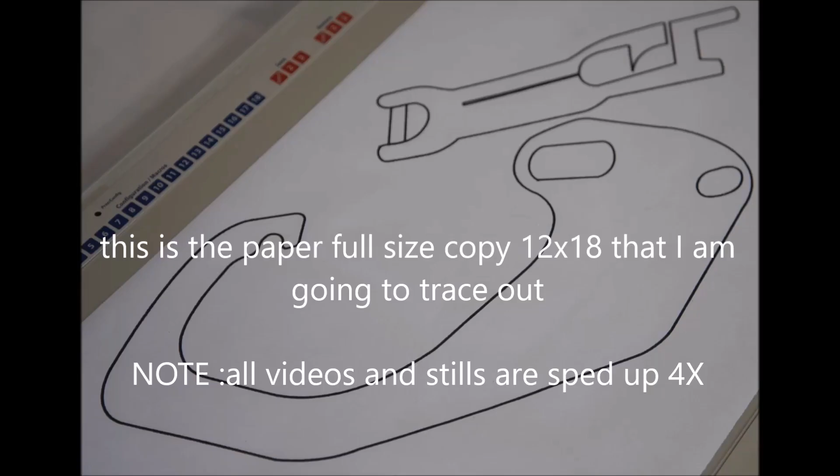I'm going to use Logic Trace to create a 3D file. I'm going to be using the small drawing board, the drawing board 6. It's 12 by 18 inches. This is the paper copy that I'll be tracing. I call this the portable drawing board.

First thing I'll do here is define the 4 points, and then I'm going to select trace. You can see here where I've selected the 4 points of the diagram.

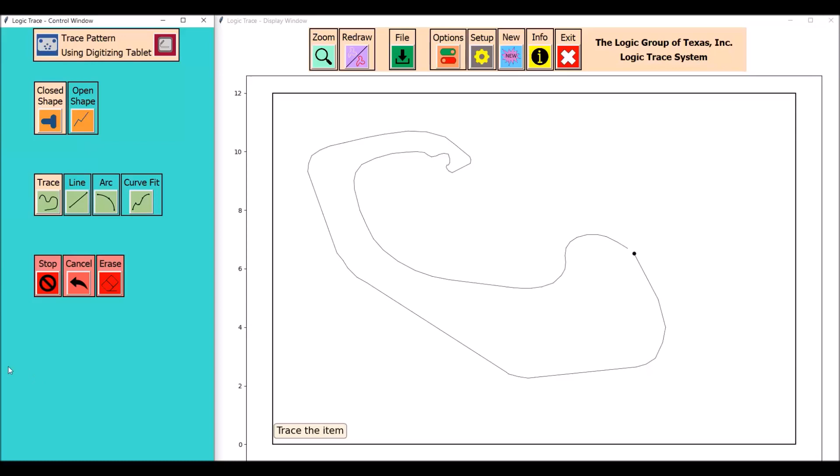This is going to be an interesting project because we're going to take a DXF file that we're going to trace out and convert it to an STL file for 3D printing.

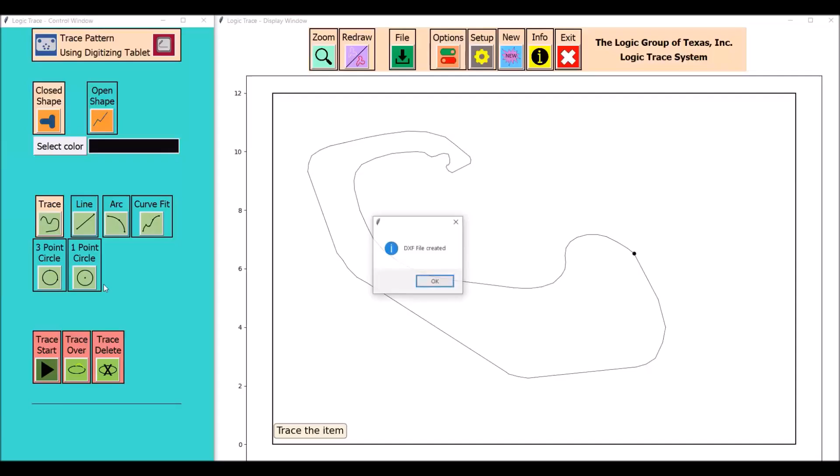It's an easy diagram to trace out. There's only 6 parts. This small drawing board has a plastic overlay, and you slip your diagram underneath. Makes it nice and neat and clean.

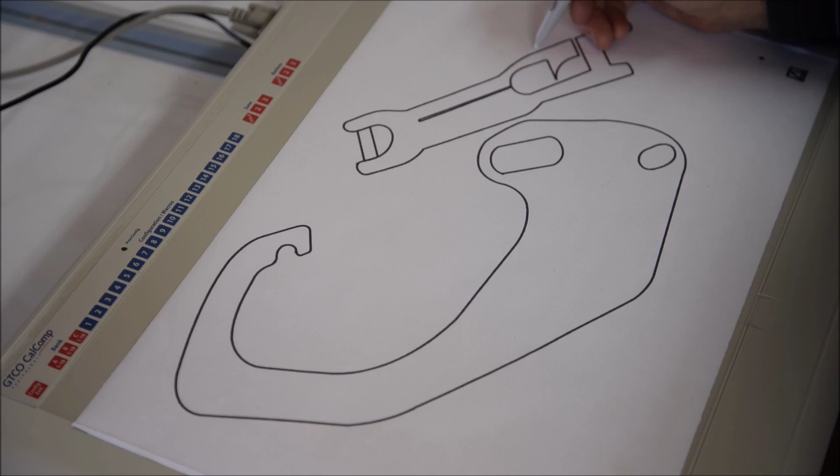You can see here that I save my work frequently. I like to save it as I go along. The main reason I save my work frequently is if I make a mistake, I can go back to that good copy and just start tracing again.

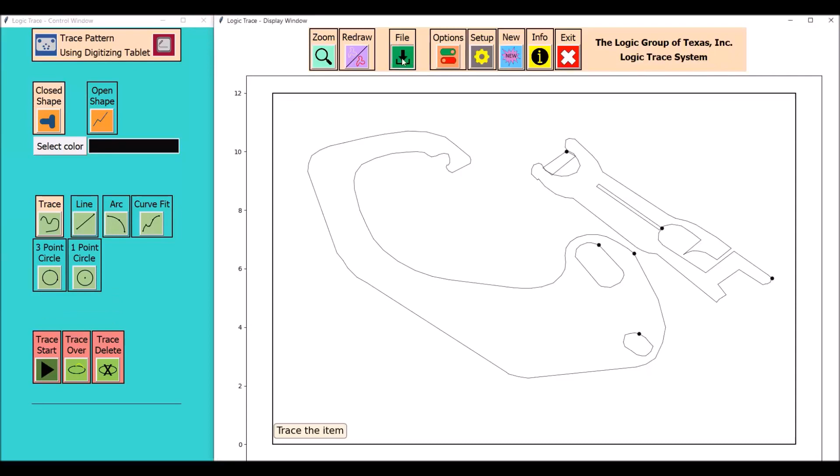I'm getting close to finishing up, so I'll save that last tracing as my final trace, and I'm going to load that file into Vectric Aspire 11.5 and check the vector quality.

In addition to checking the vector quality, I like to run my file through the simulator of Aspire just to see how that part's going to look.

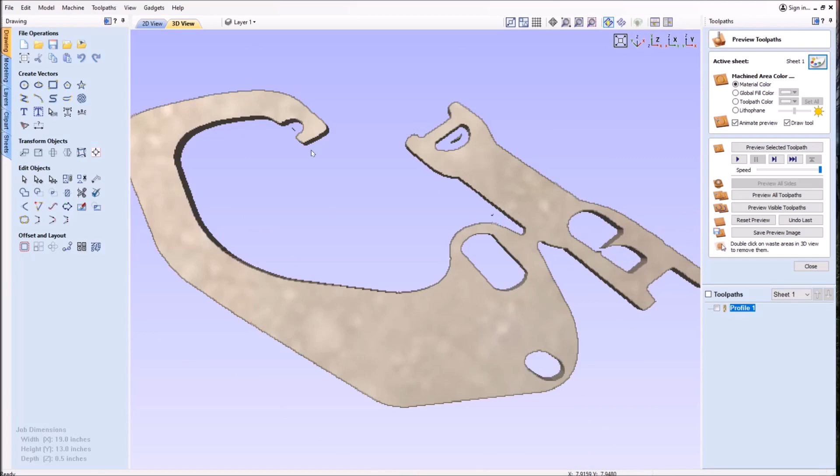This is sort of new ground for me, so I asked a friend if he would help me convert this DXF file to an STL 3D file for printing.

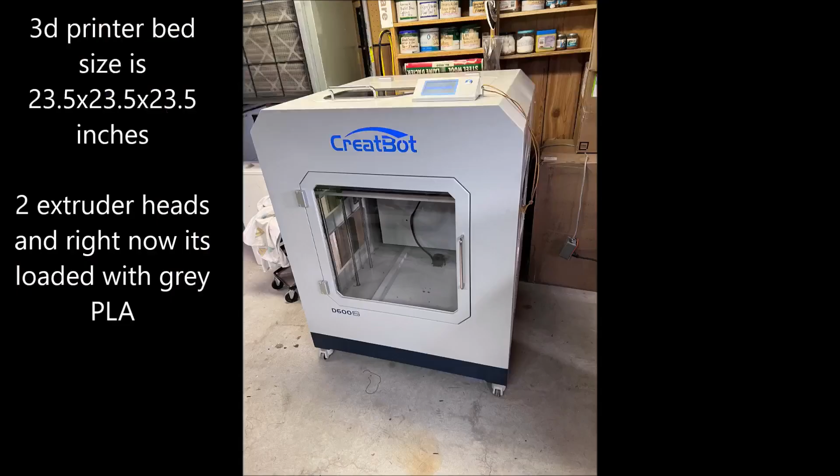Before I create the G-code for the printer, I like to run it through the printer software just to see how the file is going to look while it's being printed.

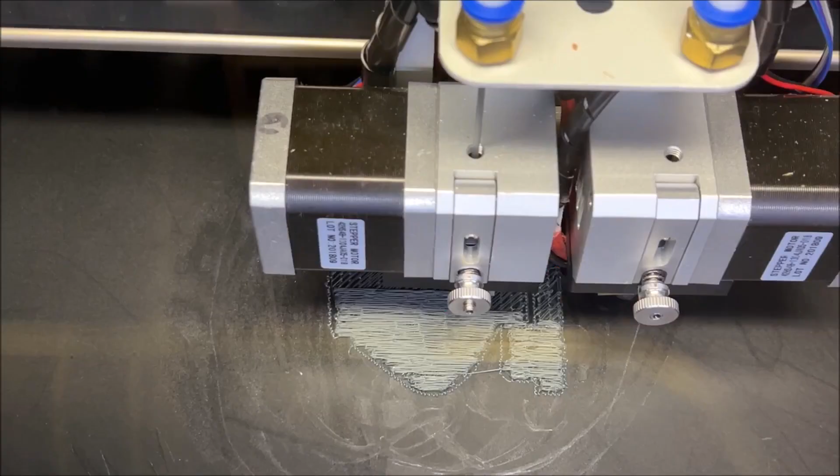The first part of the print process is to create a raft or a bottom to that print so it sticks to the bed.

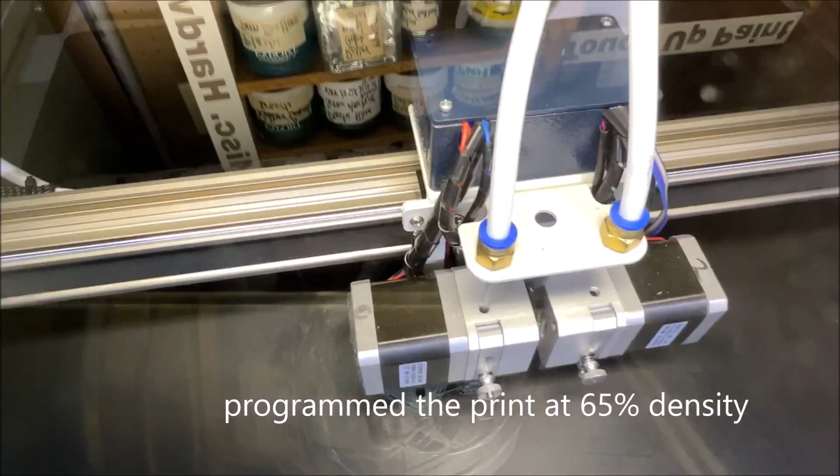This particular part that I'm printing took about 1 hour and 10 minutes. And I set it up that the density of the print was about 65%. That affects the time. 3D printing is all about temperature.

The extruders, where the plastic goes into the head there, they run at 210 degrees C. The bed, which you see the print fastened to, that bed runs at 52 degrees C.

Those circular marks that you see around the print, kind of a cloudy area, that's a glue. That's just a cheap glue that you apply. That helps to keep the print down, because the print can move off the bed.

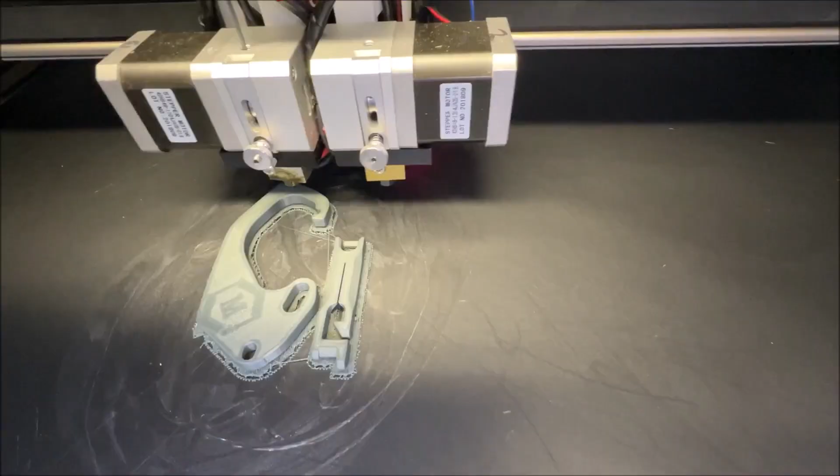When the print is complete, the heads will back off, and that's where you take like a metal spatula and just slip it underneath the print and take it off. The print is almost finished.

This shows the raft and the backing which you have to remove. Shown here, the print is complete.